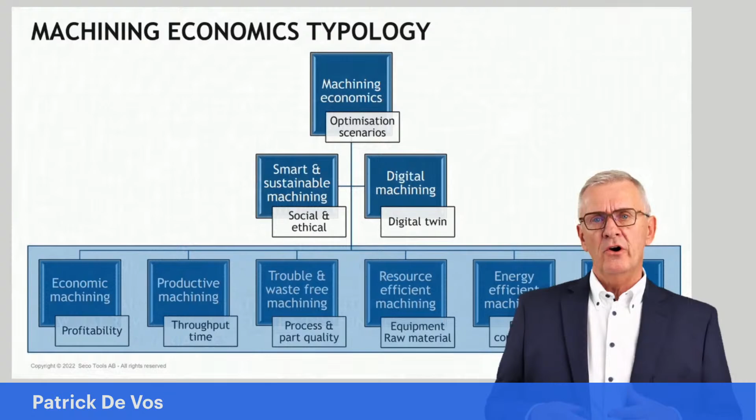So, how narrow, how wide do we talk? And that's a very important thing to consider when we talk about machining economics. It's crucial in such a way that it avoids misunderstandings between what we talk about.

So machining economics is a group of optimization scenarios, and just below it - and this is something from the last years - we start adding things like smart and sustainable machining. Smart and sustainable machining is one way of looking into optimization. Another thing people use in this context is the term digital machining. Now, has digital machining something to do with machining economics? Yes and no. Digital machining is more a methodology we could use to work within the machining economics domain.

So those two are a bit connected, but it's difficult to define exactly what we mean with it. But I'll come back to those two more specifically a little bit later on.

On a more technical level, if we talk about machining economics, there are the technical approaches. Within machining economics, the different scenarios we could use to optimize could be labeled economic machining, where we optimize profitability, or productive machining, where we optimize time.

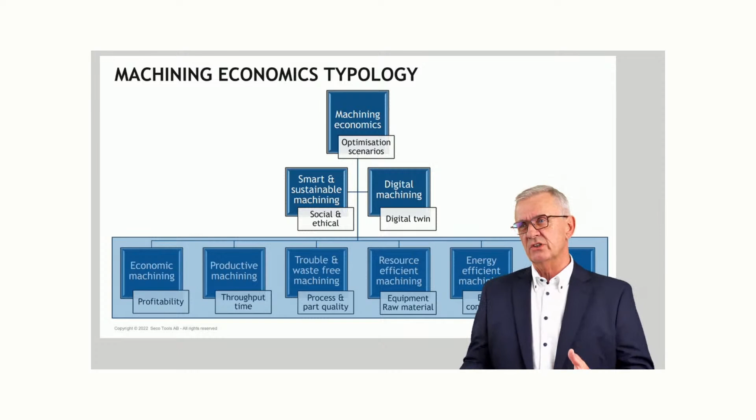And again, remember what I said a couple of minutes ago, how narrow, how wide do we define things here? We could talk about trouble and waste-free machining, where we optimize process and part quality, workpiece quality. We could talk about resource-efficient machining, where we optimize the usage of the equipment, where we optimize the consumption of raw materials. We could talk about energy-efficient machining, which is yet another strategy within that broad economics perspective, where we basically optimize energy consumption, a very important thing in present times, I think.

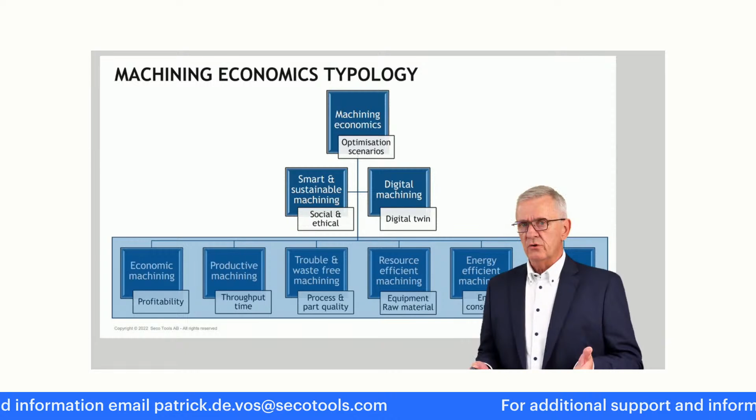And we can talk about the old word we use, green machining. Green machining is a word we use since the middle of the 80s, where we talk about the ecological impact of a machining process. So these are different scenarios we can pursue under the umbrella of machining economics.

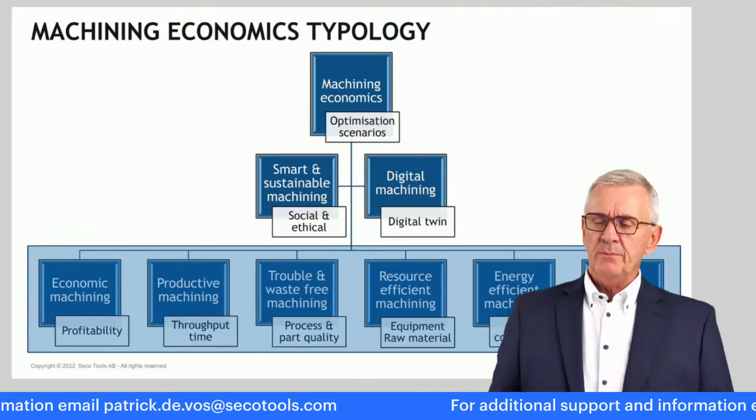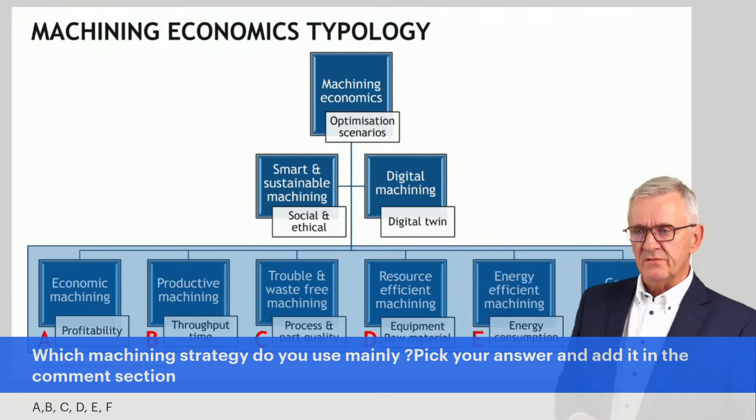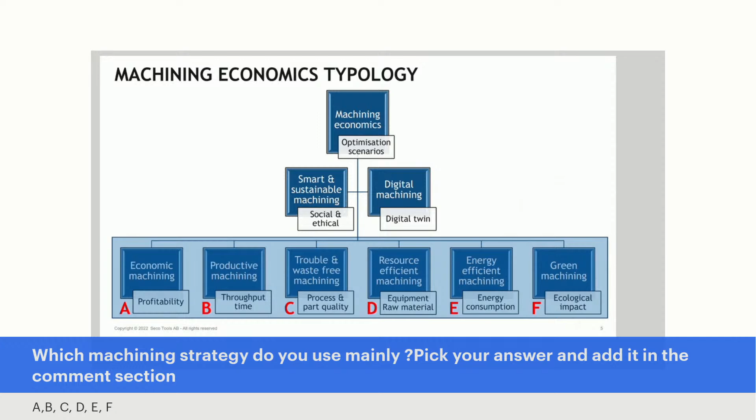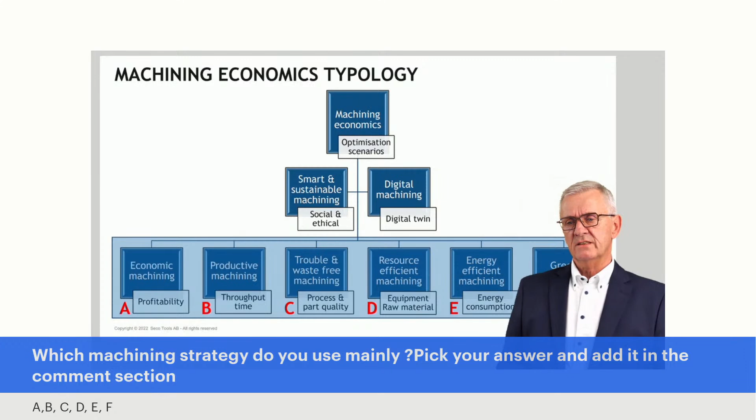Now, perhaps interesting - each one of you here, if you look at these scenarios - economic machining, productive machining, trouble and waste-free machining, resource-efficient machining, energy-efficient machining, and green machining - which one do you think is for you the most important one? Which one do you use mostly? Put this in the chat, in the comments here. I gave each of them a letter, A, B, C, D, E, or F. It's interesting for the later part in this presentation to have an idea about how you in the machining industry look on these things. So just put a letter in the chat and we'll come back to that.

Now, as I said, a few thoughts on those words we use in this context: sustainability. Sustainability is a word everybody's using nowadays, and I have sometimes an idea we've lost a little bit of focus here.

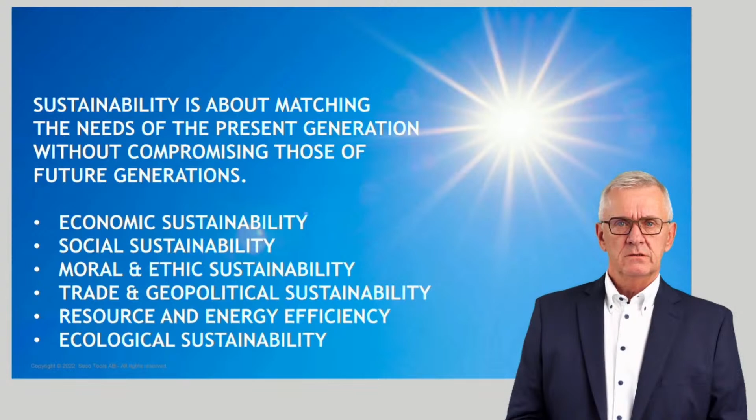So I think it's time to simplify a bit. And simplified, sustainability is about meeting the needs of the present generation - be it people, societies, companies, industry, whatever - without compromising those of future generations. Lots of people give long thoughts on this, and this is perhaps the simplest, hence the best understandable definition of sustainability: doing things today in such a way that the needs of today are fulfilled and the needs of future generations are not compromised.

That's what it's about. And if you think on that, sustainability, how to do things today, there are different accents we can put. We can talk about economic sustainability, social, moral, ethic, trade, geopolitical, resource, energy efficiency, ecological sustainability. That's the one which is most in the news nowadays.

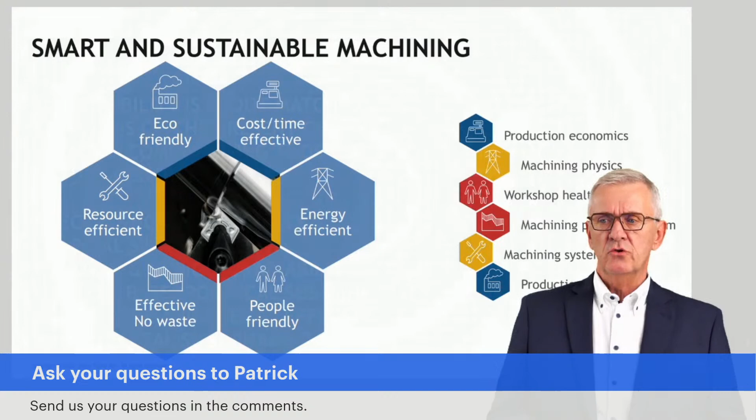And I can put them a little bit around the machining process. If we say, okay, sustainable machining, what is it about? It's about cost and time efficiency - that's a potential approach. It could be about energy efficiency - that's another approach. It's about people friendliness.

People working in the machining industry should not be frustrated, let me put it like that - frustrated due to issues, problems, impossibilities that they have to deal with. People friendliness, perhaps a very strange thing to put with a machining process, but those working in machining, I think, understand exactly what I mean with this. Machining should be effective, no waste, resource efficient, eco-friendly to the environment. So these are different accents we can put under that sustainable machining umbrella.

Smart - because often the two are combined, smart and sustainable. Smart, for me personally, I'll express a little bit here my own personal feeling about it: smart is doing things in such a way that, whatever your ambition is - one of these six - smart means achieving your ambition with the lowest effort, in the easiest possible way.

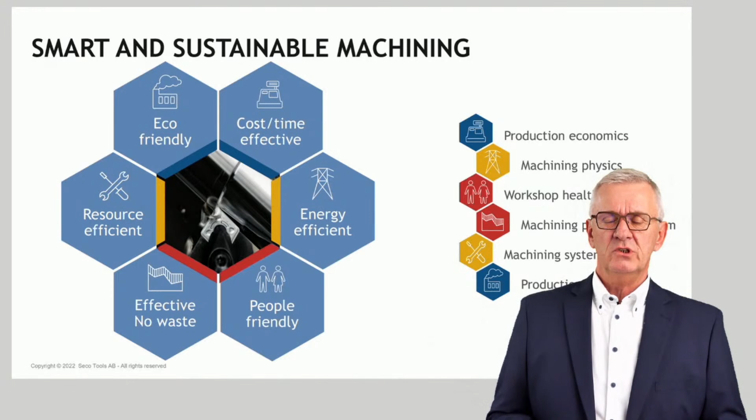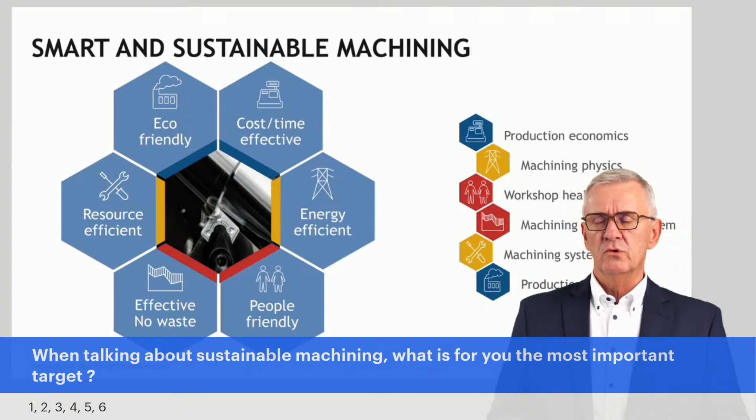Here again, perhaps I would like to know your ideas on this. If you think on this, if you think on your company, if you think on your workshop where you work, out of these six, which one is for you most important? And I know everything is important, but yeah, there can be only one priority. Which one would you select? Again, put it in the chat, please. We'll pick it up later on. Is it 1, 2, 3, 4, 5, or 6? Which is for you the most important one?

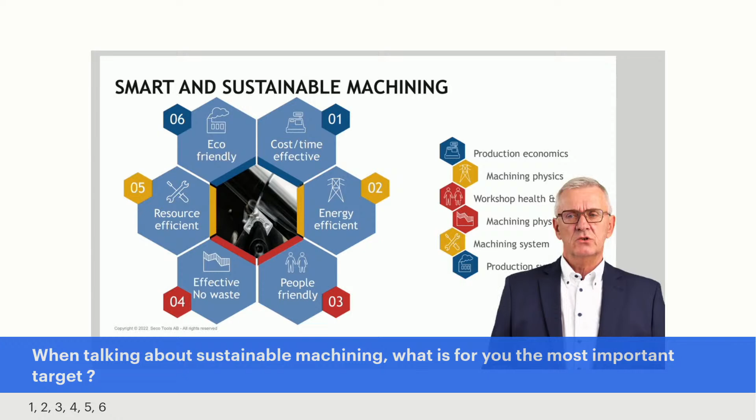Because this has consequences, depending on where you put your accent, there are slightly different approaches. Today, as we have limited time, I cannot deal with everything. But today we decided, when we were discussing this in preparing this, let's focus for today on

cost and time effectiveness. And it's a choice, you know. If you bring all the other five into the picture, in the end it leads always to that: if you manage to be energy efficient, if you manage to be people friendly, if you manage to be effective, if you use your resources in an efficient way, and if you think on the environment and do necessary things not to destroy it, you will be cost and time effective if you look on things from a company-wide perspective, not just from the machining process perspective.

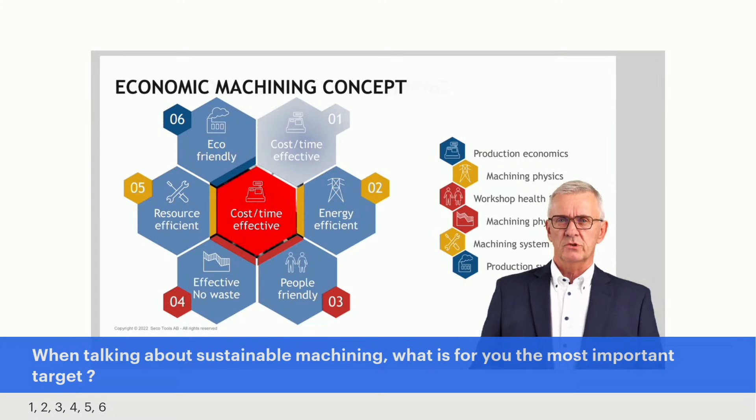Now, how can we make it happen? It's all very nice to say sustainability is a very important thing for us. And under that sustainability, we want to do things in a smart way. We want to consider a digital approach to do things, and we want to use some strategies and so on. Now, what I want to do today with you is, step by step, say okay, to make it possible, to make it happen, there are some prerequisites, some things that need to be in order.

Today, and we are in the second part of this presentation now, I want to give you five important chapters that need to be taken care of. And if that is okay, then we can really start to work with economics. But that is for the next edition. End of next month, we will talk about a situation where, yeah, we have the environment now, things are in due order, okay, how can we work with things?

So step by step, and the first step, most important step, is that you have to understand machining in a little bit more scientific manner than just the chaotic approach. Chaotic sounds a little bit negative, I know, but very often in machining, throughout the years, I experience it so often that people are confronted with a situation, they do not really understand what is going on, and then they start to trial and error, try this, try that, and if you do that long enough, sooner or later you'll find something that seems to work.

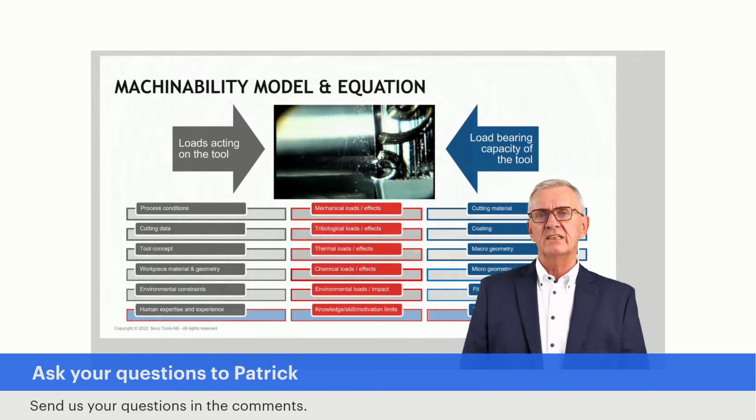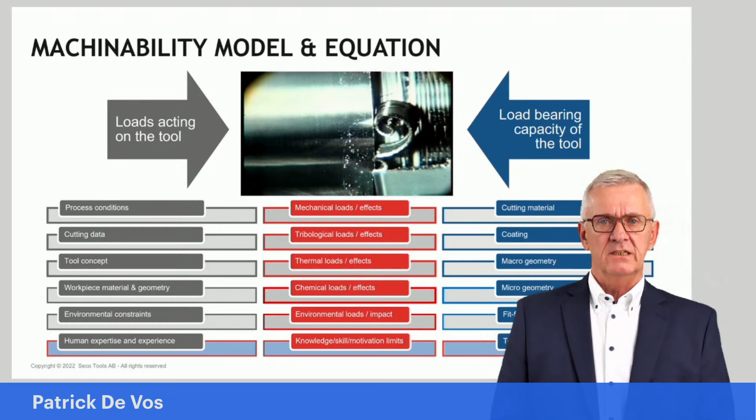Understanding machining is understanding this scheme here. What are the features of a cutting tool which are important because they influence the interaction? What things from the environment in which I do the operation do I need to bring into the equation to make sure that no unforeseen things happen? And if I evaluate the interaction, there are different approaches I need to evaluate. Because if you have vibrations, that's a mechanical phenomenon. If you have surface quality things, that's a tribological thing. So it's different things we have to understand here.

Although that is a scientific approach, the evaluation in the end, if you have been working with this and you created a situation and think, okay, is this good now? That evaluation is a more pragmatic evaluation. That evaluation, we have been developing measuring tools, measuring approaches, methods that will tell us if we solve this machining equation in the correct way.

There are two tools I want to draw your attention on. One is what we refer to as GTDA, Global Tool Deterioration Analysis. In other words, look at your cutting tools. Your cutting tools tell you what happened during the machining process. The other thing I would say is listen to the people. Listen to the operators, listen to the machining experts.

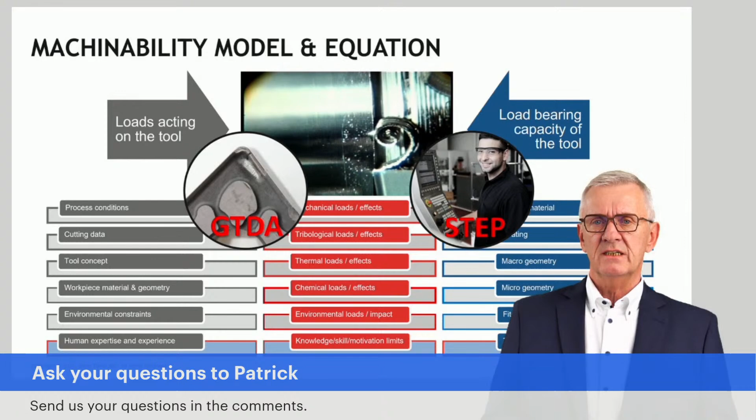They have a feeling for a process, and they also give their sometimes subjective approaches. In machining, subjective approaches are not always bad. That's the process, and if you master it, if you control it, if you are capable of making a process reliable - meaning it delivers what is expected, a correctly finished workpiece - the next thing we can do is talk about the economical side.

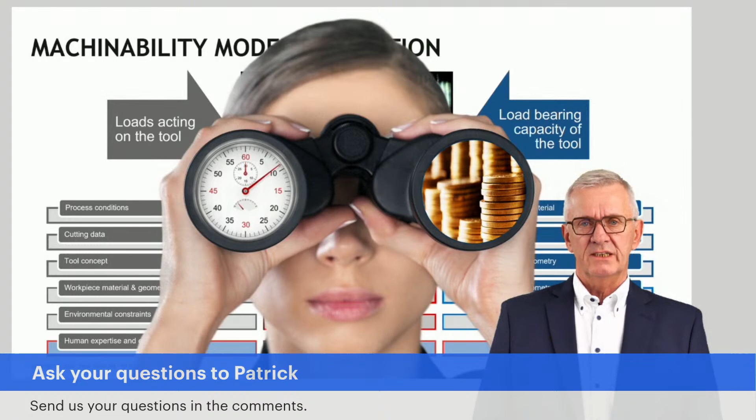We can start talking about optimizing times or costs. So step one: if you can describe a machining process in one solid and consistent physical model, it's possible to start talking economically about the machining process.

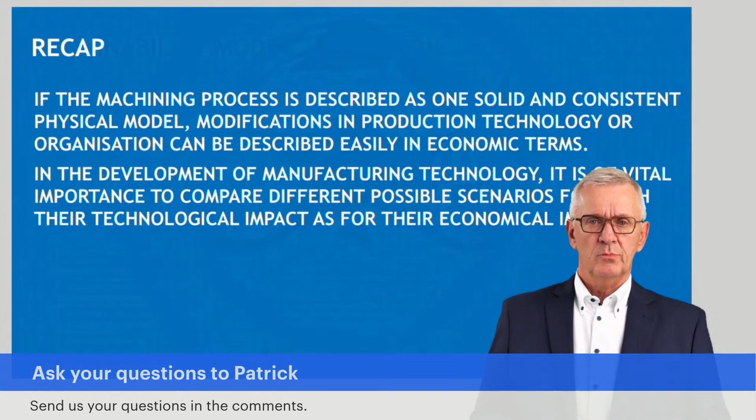Because if we want to compare different scenarios, not only from their technological perspective but also economical perspective, we have to master the process. We have to be capable of creating a reliable, predictable, controllable process. Now that is possible, but there is one element that is crucial in this, and that's the cutting edge.

I use the word cutting edge on purpose, and not cutting tool, because the thing which is in contact with the workpiece material, actually doing the machining, is a cutting edge. A cutting tool is the equipment behind the cutting edge that supports it in the machining process.

Smart tool selection - we spent a previous session on this - and here is the word smart again. It's very important: smart means minimum effort, minimum issues, minimum problems, yet achieving the main targets.

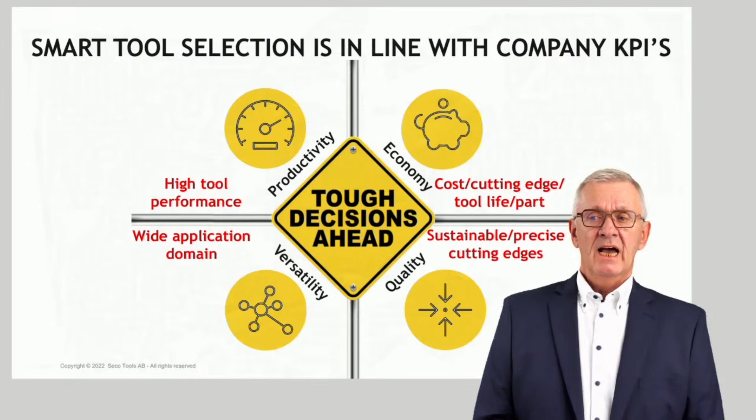Smart tool selection must be in line with the overall company KPIs. I made the statement before that smart tool selection is something I see as a management task. It's my way of saying smart tool selection is too important to leave in the hands of technicians. Technicians have the major responsibility later on in answering all the technical things.

But depending on what the company stands for - productivity, economy and costing, quality, or versatility, think of small batch production as a major KPI for a company - each of these four basic approaches leads to a specific choice of tooling system.

If you go for productivity, you need a tooling system that performs extremely well. If you go for economy, you need tools that, from a money perspective, cost as little as possible to use. If you go for quality, you need quality tooling.

You need tooling with sustainable, reliable cutting edges. If you go for versatility, you need tools with a broad application domain. And this is a choice that needs to be made before you start talking about technical stuff like carbide grades and geometries. This comes first.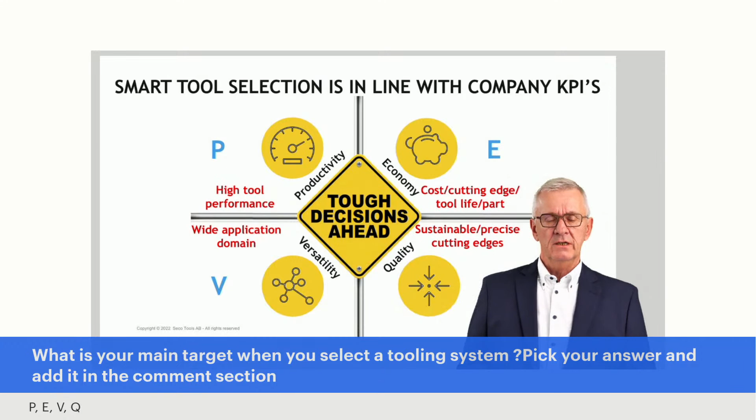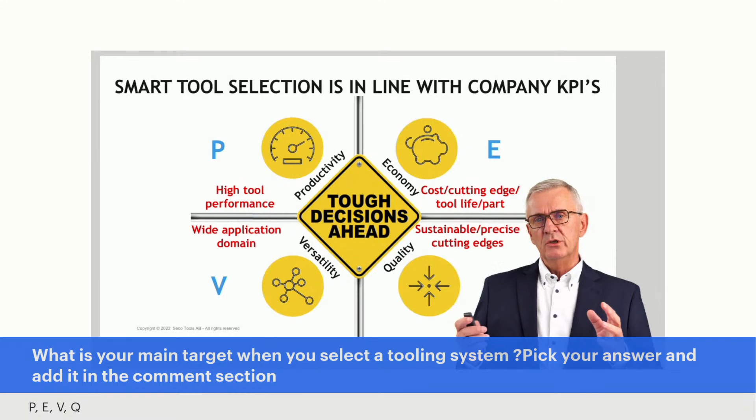Let there be no misunderstanding: each of these four is good. It's not about bad or good here, it's four different approaches, but it's a choice that needs to be made. Because if you fail to make this choice, you end up in total disorder in the workshop when it comes to tools, tooling, and people using the tools. A basic, important choice to take.

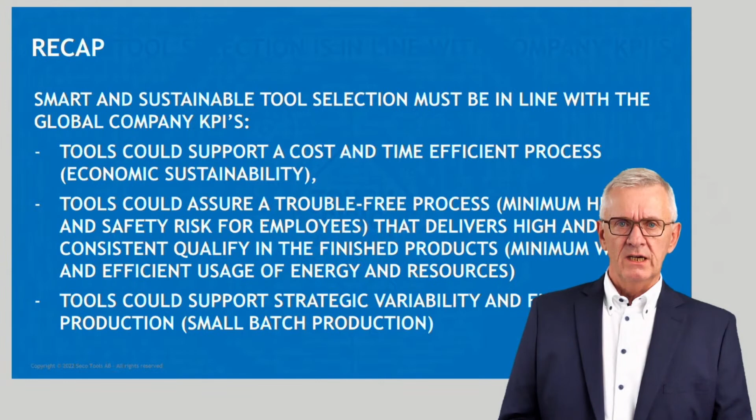Step 2: make sure that the tools you selected are as much as possible in line with the overall company KPIs. If that is done, if that is thought over well, then tools will support in a smart way cost and time efficiency, economical sustainability.

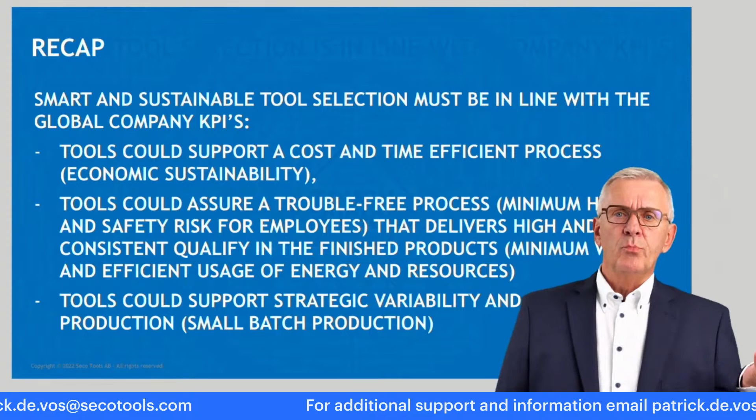And tools, in that respect - taking point one on board again - tools must support trouble-free machining. That is very important. So I understand machining, that is my foundation. I understand machining from a scientific perspective. I know what to do, how to control, how to predict.

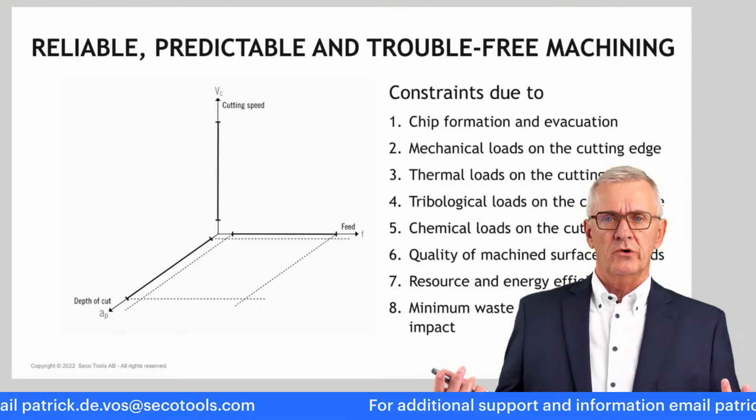Second thing is I have been thinking very wisely about my basic tool selection - should tools support productivity goals, economical goals, quality, or versatility goals? Third thing is: know your playground. With the tools you have selected, know what is possible to do with them. This is about knowing the limits, knowing the borders, because from whatever tool, in the beginning everything seems possible.

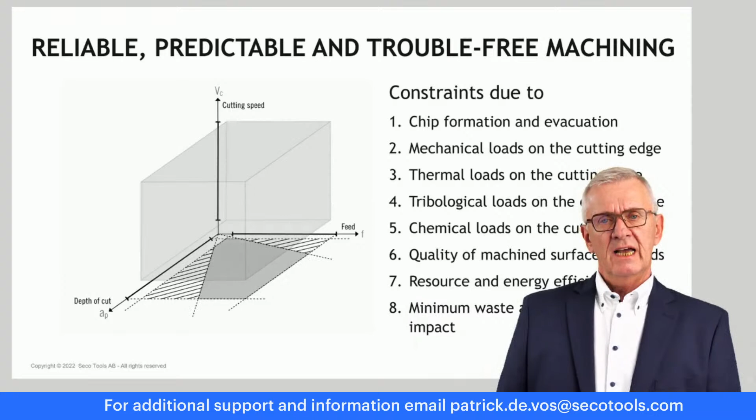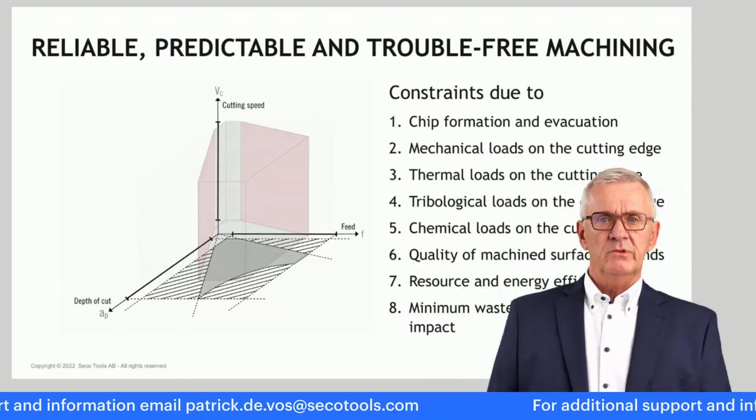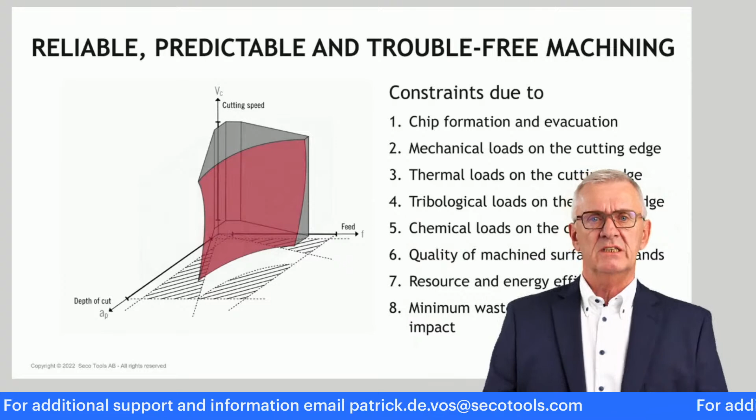Each time we launch a new tooling system, the initial message is that this new tool can do everything. Nice, good, smart. Then reality hits in, and suddenly we start to realize that from a technical and technological perspective, there are constraints. That tool that can do everything, yes, very nice, but we have to make sure the chip formation is good, the tool doesn't break too much, and temperatures are kept within certain limits, and so on. Suddenly we go from everything to a realistic domain.

The graph you see here to the left is a simulation of how certain realistic, practical constraints will limit the choice we have in cutting speeds, feeds, and depths of cut. Knowing your domain, I mean with that, know your playground. You should know this thing. You should know what you can do, how far can I go with cutting conditions.

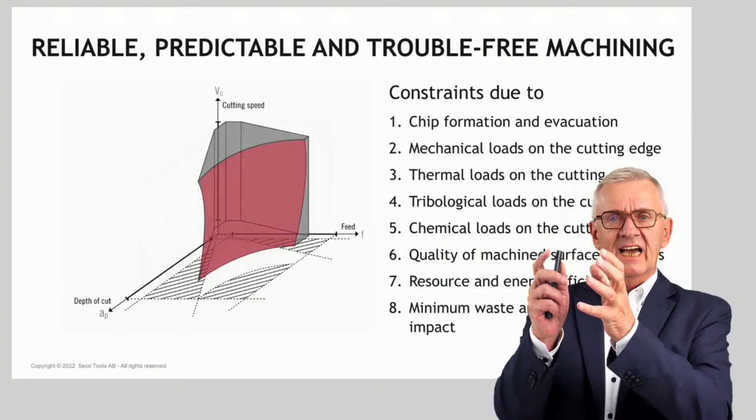Now, to continue this visualization, within this volume of possibilities where everything is under control, there are 1 million possible combinations of cutting conditions. You can combine cutting speeds, feeds, and depths of cut. There are 1 million combinations. Which one do you select then?

The moment you start thinking that, that's when you start going from the technological side of machining into the economical side. Again here, there are basically three kinds of strategies which we can use.

You can show a tendency to think in terms of, I want to go for the bigger depths of cut, or I think in terms of we go for the bigger feeds, or we think in terms of we go for the higher cutting speeds. And you know, these things you know about.

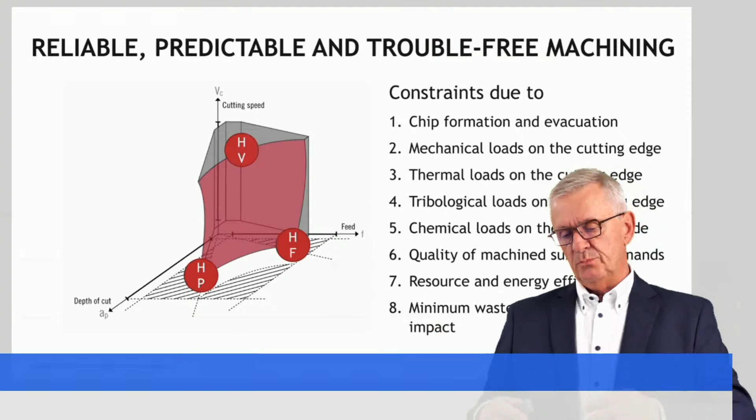I'm talking here about so-called high-speed machining, high-feed machining, high-performance machining. Each time a new tool arrives on the market, people talk about it being a high-speed tool, or a high-feed tool, and whatever.

But make sure you have your sequence okay. You decide first what you want, and second, you must make sure that the tool performs in what you want. Again, for me, it's interesting to know what has your preference.

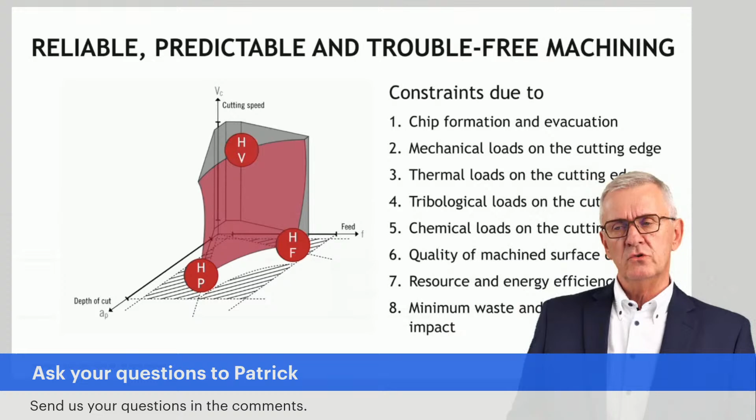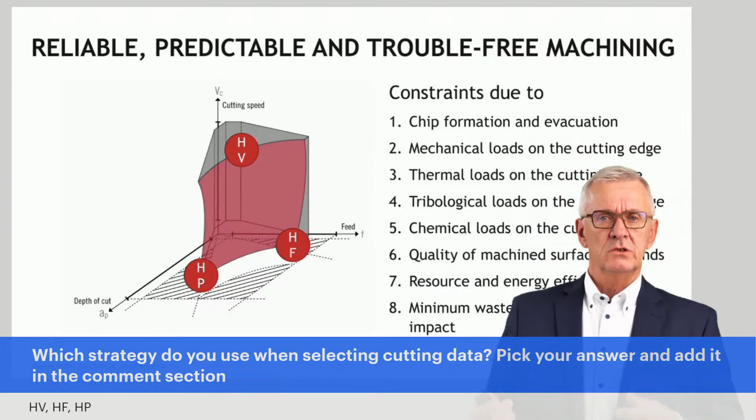If you think in terms of machining from an economical perspective, do you like high feed machining? Here the letters you can put in the chat: HF for high feed, HV for the high speed approach, or HP for the high depth of cut approach. It would be interesting to know your opinion on this, what do you think has your preference here, and you can write a bit about why you prefer certain methods.

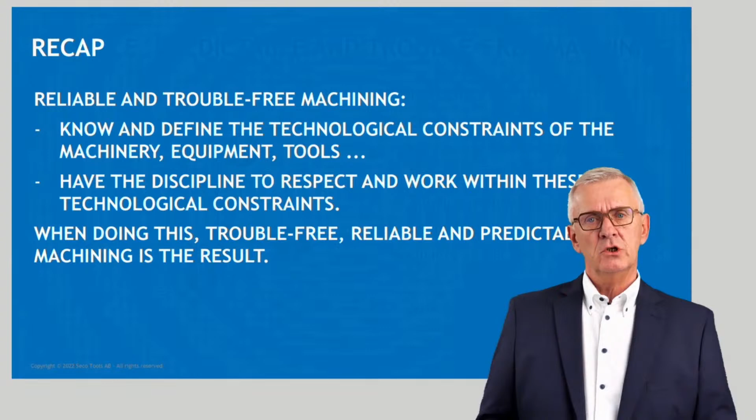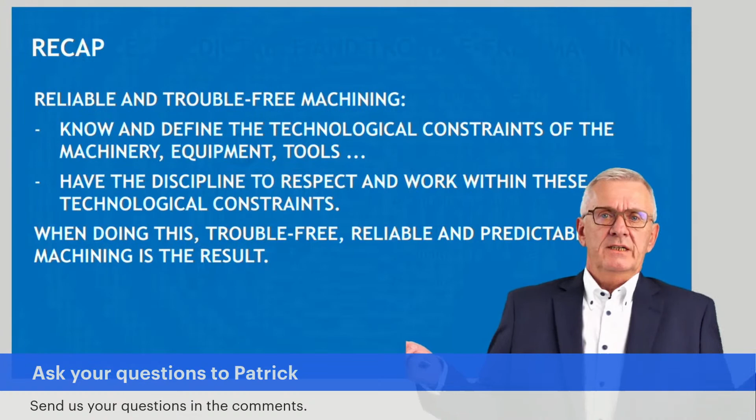So know your playground, know the borders, know the limits. To be able to know them, you have to have the scientific insight in machining, otherwise you cannot draw the lines. And second, perhaps more difficult, have the discipline to respect the borders. I hear so often people know there is a limit, yet they try to go beyond the limit. Then after a while they are a bit surprised, they say, 'Oh, I have problems.' Yeah, if you don't respect the borders, you end up in a difficult situation.

Now we are ready to make the jump towards economic machining. Don't confuse machining economics with economic machining. Machining economics is a collection of scenarios, including sustainability things. You can say I want to optimize the time, I want to optimize the cost, I want to optimize quality. That's all the different scenarios.

Economic machining is within these scenarios. Remember one of the first slides I showed you. Economic machining is about optimizing costs and time, optimizing productivity, and the costs related to the process. Understanding this, this picture will be the starting picture for the next session, and then we will jump into details based on this picture.

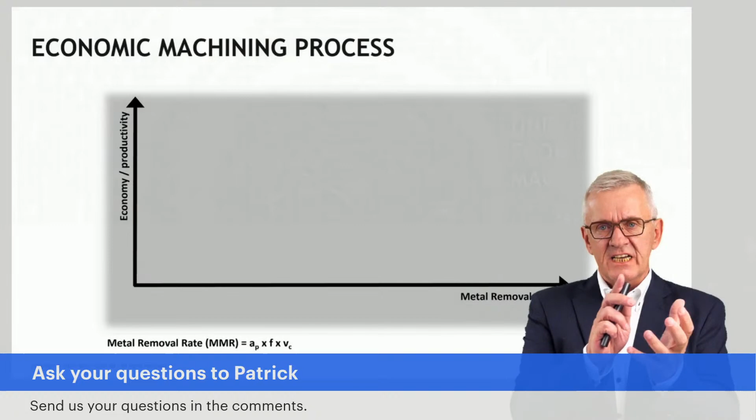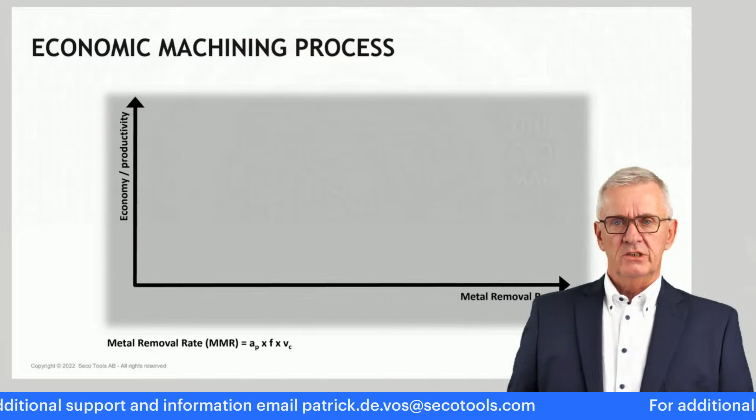Next comes the playground. You have been selecting the borders or defining the borders where you have to stay within. And within that, now I start to talk about where machining experts step into the picture: which combination of cutting conditions do we go for? The general picture is that if you go for higher cutting conditions, and why would you go for higher cutting conditions? Yeah, to increase your metal removal rate, to increase your productivity.

But there is a consequence from an economical perspective: your tooling costs go up. People familiar with machining know the reason. If you increase your cutting conditions, your tool life goes down, and if your tool life goes down, you need more cutting tools to do the same job, which increases your tooling costs.

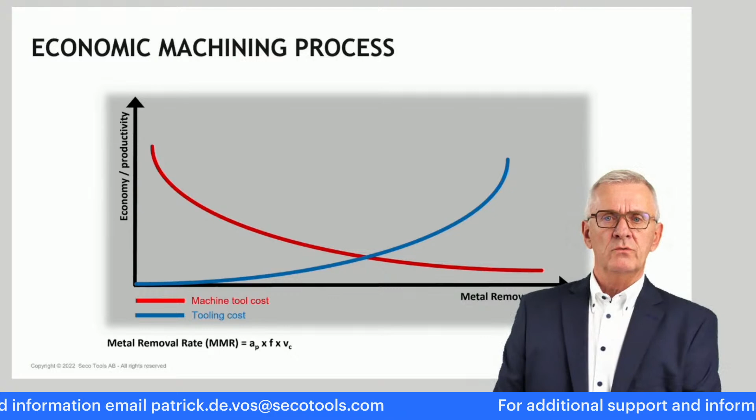On the other hand, the costs for machine equipment go down. If you increase your cutting conditions, the work will be done in a shorter time, and that means the cost you need to bring into the calculation to cover the machine goes down.

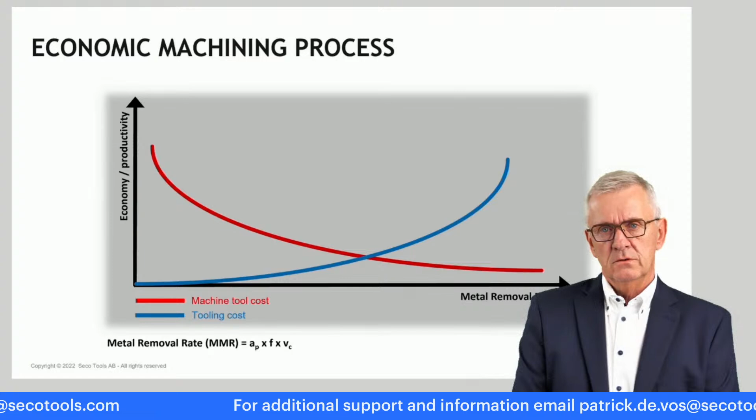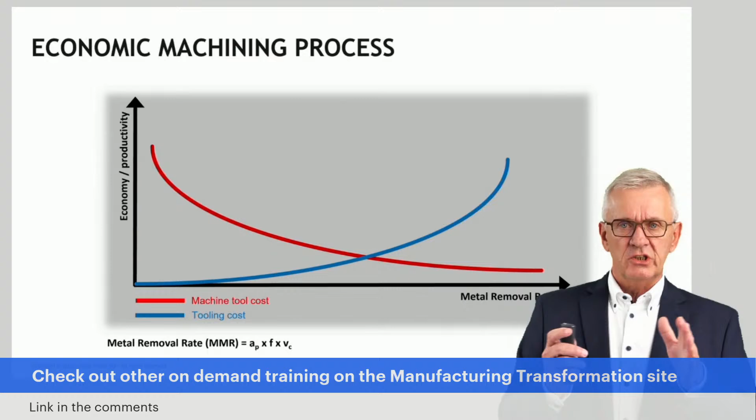These are the two variable costs — variable meaning costs that change when the cutting conditions change. Next to this, you have a lot of other fixed costs, but we'll talk about that in the second session: material costs, fixing costs, setup costs — all basically not influenced when you change cutting conditions. So we leave them out of the equation for today, but next time we bring them back in. Here, just for understanding, we only work with variable costs, costs that change when I change cutting conditions. The two together give me the total costs related to a machining process.

What we see here is that this yellow line is not a straight line, it's a curved line. If you think in terms of productivity, the time needed to do a certain job, what we see is that if you increase your cutting conditions, your productivity goes up — that's why we increase our cutting conditions. But not forever. Somewhere there is a set of cutting conditions where the line turns around and you lose productivity.

Why do you lose productivity despite increasing cutting conditions? When your cutting conditions are too high, your tool life becomes very short, and you need to stop often to replace the cutting edge. But that takes time, and the theoretical time you could gain by increasing cutting conditions even further, you lose, because the time you need to replace cutting edges increases very fast. That means there is somewhere a set of cutting conditions that gives you maximum productivity.

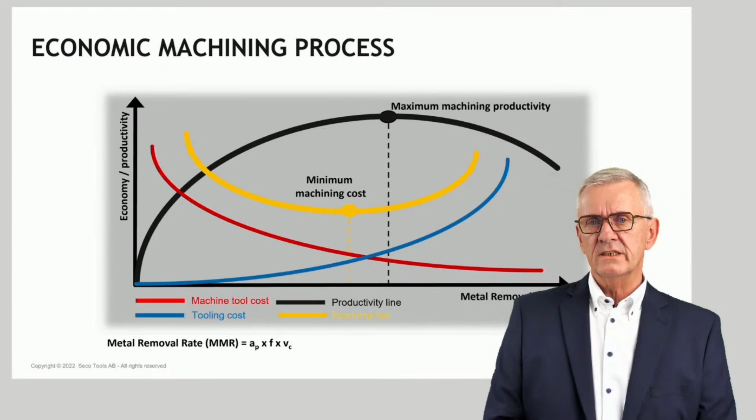It's not the highest possible cutting conditions, it's a certain set of cutting conditions. There's also somewhere a certain set of cutting conditions that gives you minimum cost. Now, these two things will be the subject, very concretely, for the next session next month. How do I find these? Where are they? What is the set of cutting conditions I should use to have minimum machining costs? What is the set of cutting conditions I should use to have maximum machining productivity?

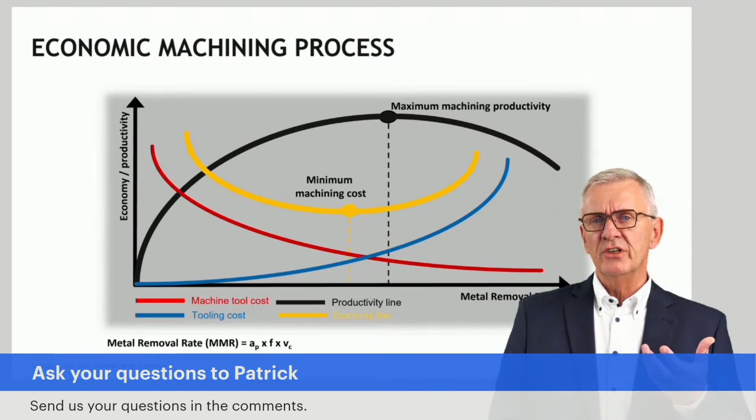That is what I call having insight, understanding from the economical side of machining — having insight, knowing how to have the best possible balance between cost efficiency and time efficiency. And that balance is what we aim for with what we refer to as economic machining.

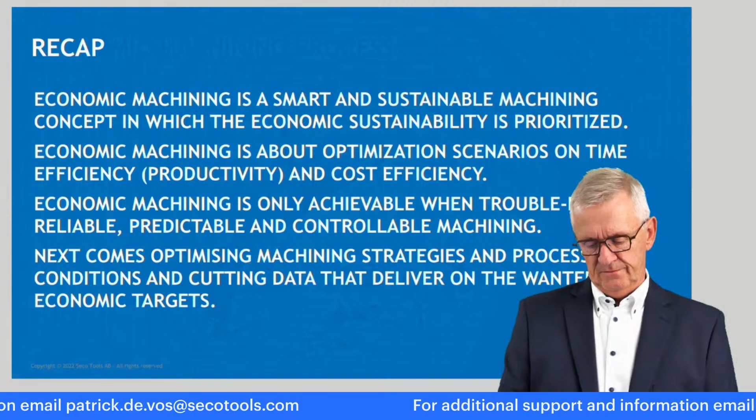Economic machining is a smart and sustainable concept. Smart, as easy as possible — that's my definition of smart, with minimum effort to achieve still my target. Sustainable, doing it in such a way that it fulfills today's needs, but respects the needs of future generations.

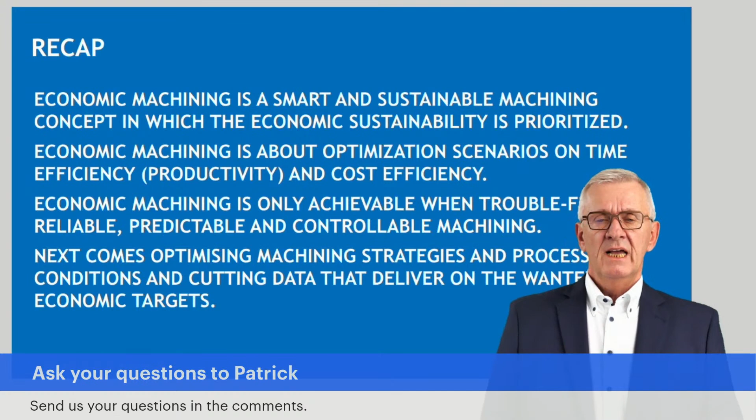It's an approach where we balance as good as possible cost and time. Still open in this discussion is, as I was emphasizing so much in the beginning, how wide do we see this? Do we bring into consideration only the machining process and close our eyes to the environment? Or do we say, no, that's not realistic, because we know the machine is going to stand still now and then to set up new workpieces because there was a technical problem. And while the machine is standing still, that costs time, that costs money. So perhaps looking just at machining is not the smartest thing to do.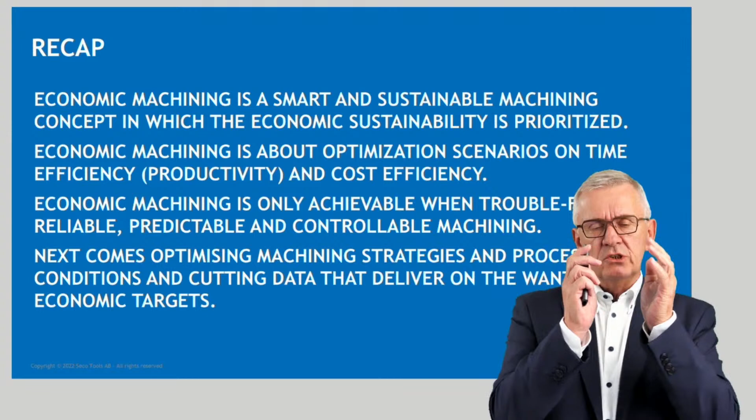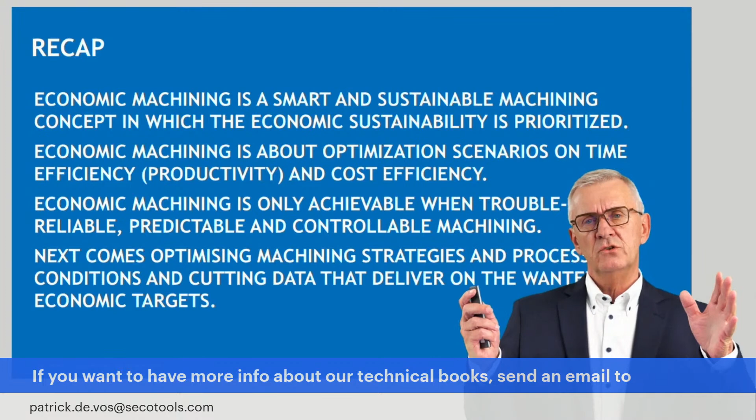We should widen our scope a bit, but again, that's for next time. For today, I leave it as a question, something for you to think on, to reflect on: how wide do I see this?

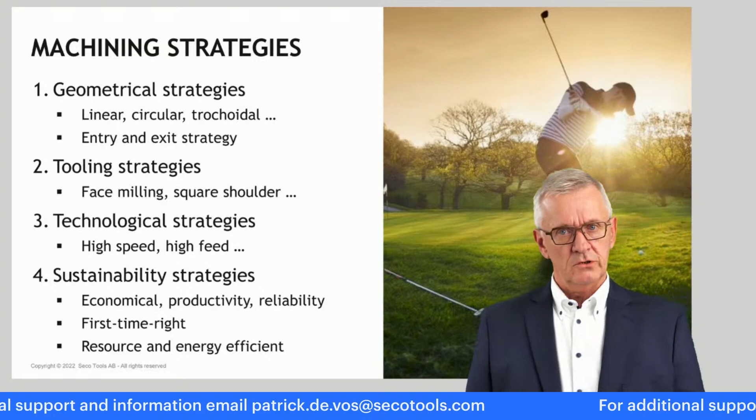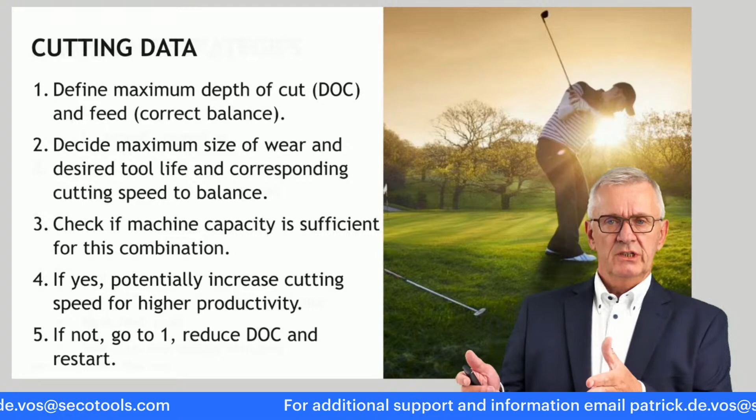Once you start doing this, the fifth thing is here, and here the experts have to step in. Here we start talking about machining strategies — and for your information, this season we have quite a lot of interesting subjects on the strategies, the machining strategies. How are we going to do the machining? And within the machining strategies, how are we going to define our cutting conditions so that they fulfill both technological demands — we want a reliable process, my playground — and economical demands — cost efficiency, time efficiency, whatever.

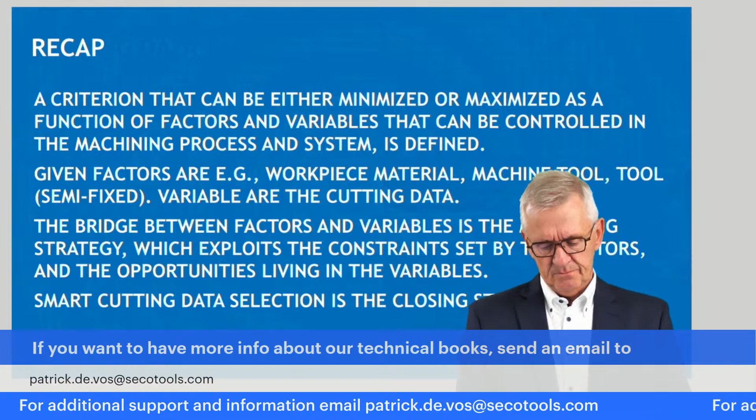We started to talk about machining economics, a collection of scenarios to optimize. Optimization is good, but we need to discuss what we want to optimize. And once we define that, we need to define factors, we need to define variables, and run the optimization scenario.

This means creating an environment where we can work in a good way with machining as a manufacturing process, in such a way that it fulfills the economic targets of the company doing the process.

This is 5 conditions. Condition 1: you have to understand machining more than just 'I'll try and see what happens.' You have to have that physical insight into what exactly is happening. And the 4th step is about economic machining, the same insight, the same understanding.

What exactly do we mean now with economy? These 2 steps are about knowledge and insight. These things, how to say, you can learn. There are courses to learn this. It's knowledge, it's insight, understanding.

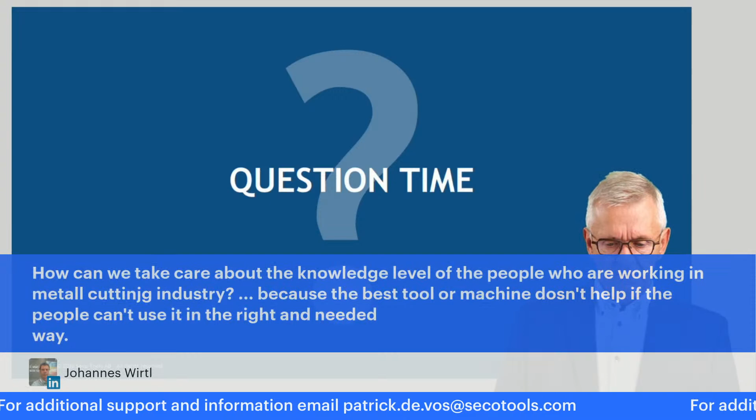There are more questions. We have time. There is a question here: how can we take care of the knowledge level of the people working in the metal cutting industry? Because the best tool or machine doesn't help if the people can't use it.

That's my personal passion. I told you in the beginning, a passion of mine is machining, as a scientific thing, as a physical process—I want to understand that. Another passion of mine is the economical side, making sure machining supports the economical targets of the company that uses it. My third, perhaps biggest passion, is people.

Sometimes people ask me what I'm doing at Seco. I say I teach, I'm a teacher. Because you can have the best possible tool in the world, the best machine available, but if the guy operating it doesn't know what he's doing, it doesn't serve any purpose whatsoever.

I don't know who asked this question, but it shows real insight. Let me give you a personal answer: I'm more than 40 years in machining.

If you give me the best milling cutter in the world, I can kill it in 5 seconds, if that's what I want to do. But give me a milling cutter which is not perhaps the best choice, and I'm capable of making it work also.

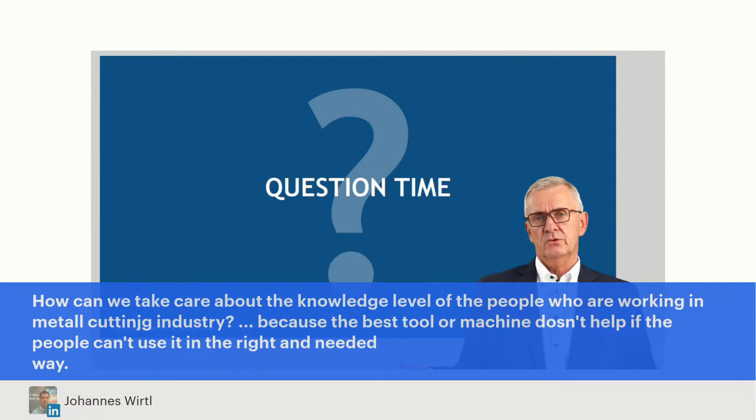Where we share the knowledge we have on machining and tooling technology. So knowledge is available. Skills is about practicing, training. Like sports people, they know what to do, but they have to train, they have to practice to increase their skill level.

And motivation. With motivation, I go back to my people friendliness in sustainable machining. I think everybody in machining with a broader responsibility should invest in people, next to investing in machinery, hardware, tools and so on. Invest in people, their knowledge, their skills, their motivation.

Everybody talks about GTDA, the global tool deterioration thing. People say, can you teach me? Yeah, of course I can teach you, it's not a big thing. But if you want your people to do that, you need to give them a little bit of equipment too, I mean a magnifier glass and things like that. So it's about knowledge, skills, and giving your people the equipment they need to do their job, and that will create motivated people, and then you have people-friendly machining.

Sorry, as I said, this is my passion, people and the knowledge. I see in the meantime we come close. Okay, perhaps one more question and then we should come to a conclusion.